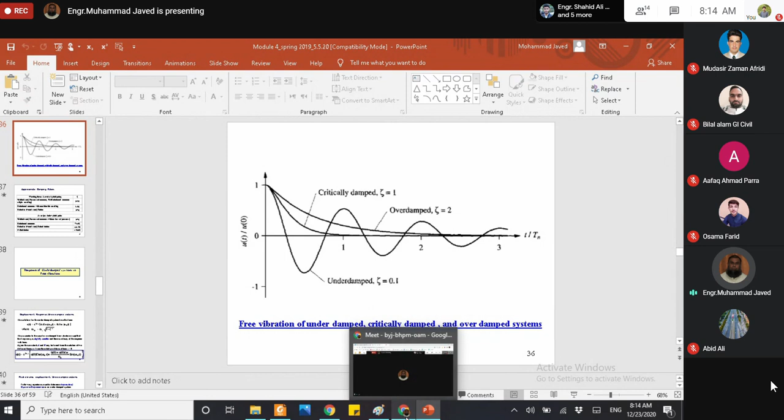As far as I remember, last time we discussed various types of damped systems, which are critically damped system, over damped system, and under damped system. And as we discussed, critically damped and over damped systems are of no use from civil engineering point of view. The only type of system of interest to civil engineers are under damped systems, that is the damped system in which the damping ratio is less than 1. So in the next slide...

I am providing approximate damping ratio for various materials. If we have various structures, but the stresses are low, not more than half of the yield point or ultimate strength, then the damping ratio for welded steel, pre-stressed concrete, or well reinforced concrete which has slight cracking is 2 to 3%. Reinforced concrete structures with considerable cracking have relatively more damping ratio, 3 to 5%. And in case of bolted or riveted steel and timber structures, the damping ratio is 5 to 7%.

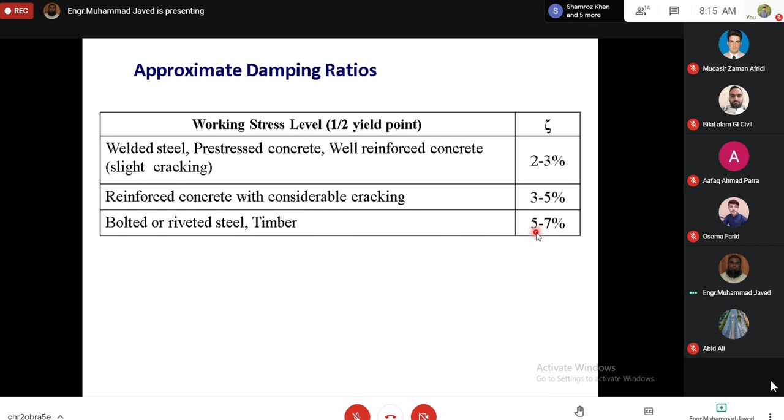However, if the stresses are high, in the vicinity of yield point or ultimate strength, then the damping ratio for the same materials increases, because with the increase in stress, the damage or extent of cracking increases. Consequently, the damping ratio will increase.

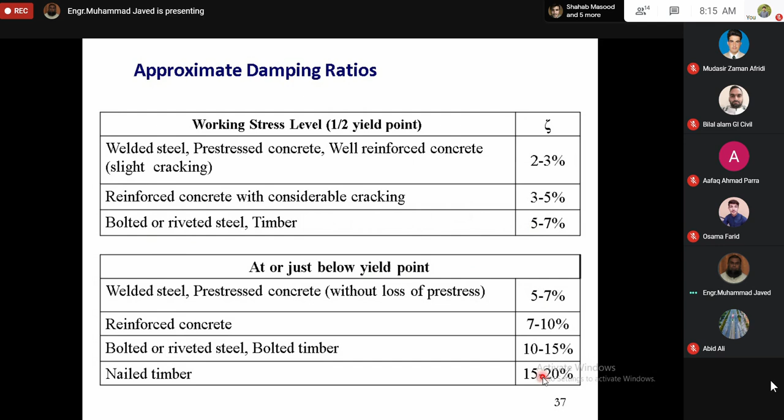So as I discussed, from civil engineering point of view we are interested only in under damped systems. Therefore, in the coming slides we will discuss the response of an under damped system when subjected to free vibration.

Just like the undamped system, we can solve the second order differential equation for an underdamped system, which is of this type, in which A and B are constants that can be determined by initial conditions. And omega D, which is known as the damped natural frequency, is the undamped natural frequency into the square root of 1 minus zeta square.

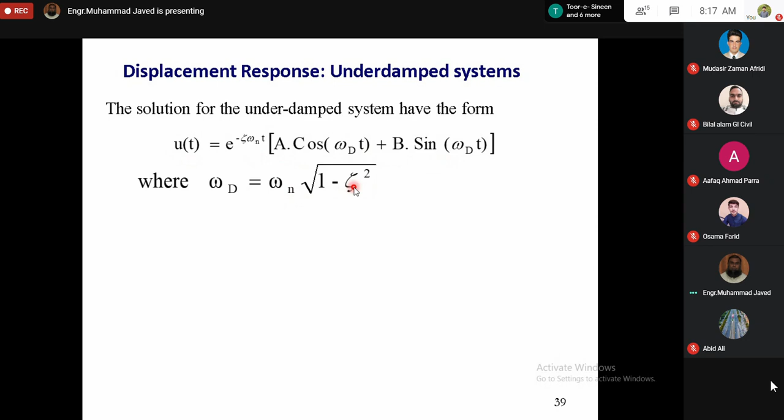As I said, A and B can be determined by initial conditions, that is displacement and velocity at the start of free vibration at t equal to 0. If we determine these values and substitute them in this equation, the final equation is given below. From this equation we can find the displacement response of an underdamped system when subjected to free vibration.

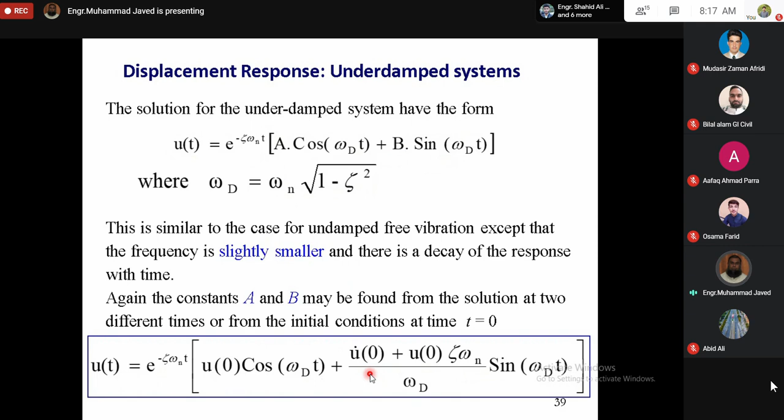Once we calculate U0, we multiply it with K to get the peak value of equivalent static force.

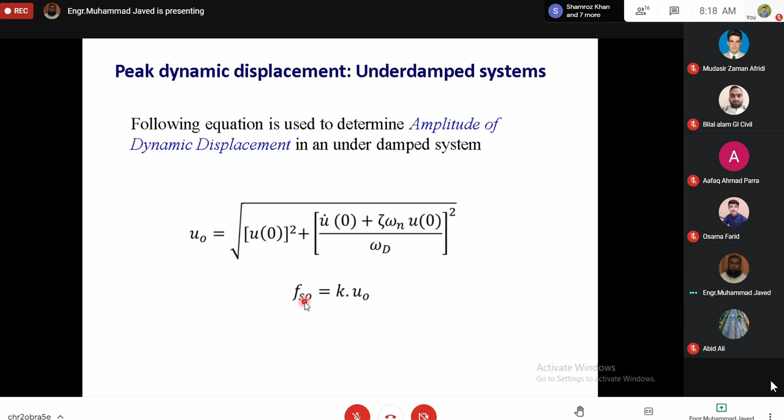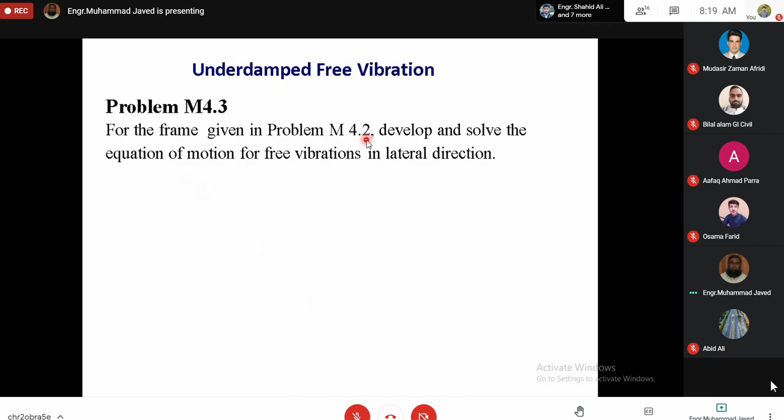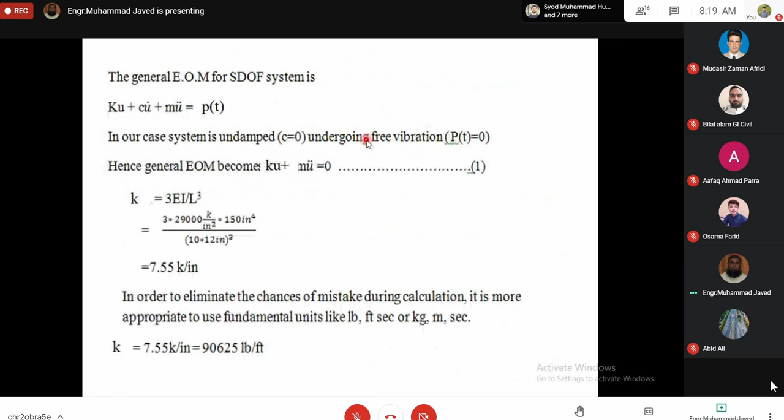So now we are in a position to solve a problem, and we will resolve problem 4.2 for a damping ratio of 5%. If you remember, in problem 4.2 we were having a frame which we considered as an undamped system. Now we will consider a damping ratio of 5%.

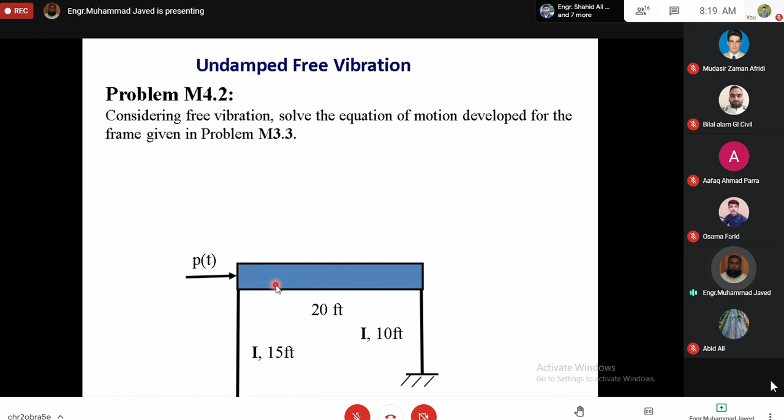As we calculated the natural circular frequency in problem 4.2, which was 34.79 radians per second, from this we can calculate the damped natural frequency, which is almost the same: omega n is 34.79, omega d is 34.77. The insignificant change is because the damping ratio is small. If zeta is 0.05, zeta square will be 0.0025, and 1 minus zeta square will be 0.997. The square root of 0.997 is almost equal to 1, so there is no significant change in the values of these two frequencies.

From this we can calculate the value of the viscous damping coefficient. Damping ratio is viscous damping coefficient divided by 2m omega n, or C is equal to zeta into 2m omega n. Mass is given, omega n is calculated, zeta is 0.05, so we can calculate C.

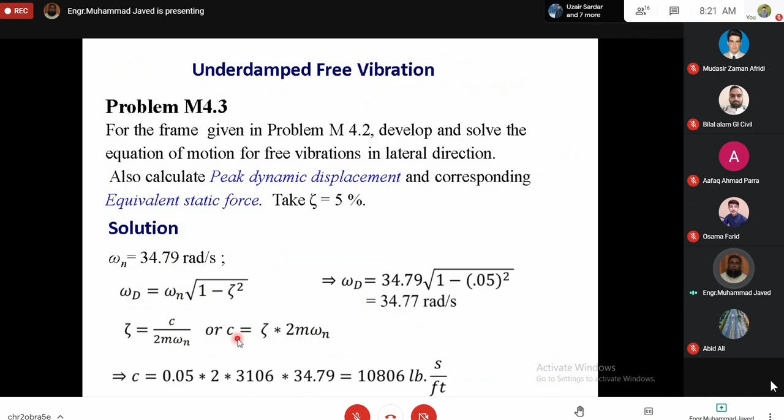And we can substitute this value in the equation of motion for the undamped system subjected to free vibration. This is the equation of motion for a damped single degree of freedom system subjected to free vibration.

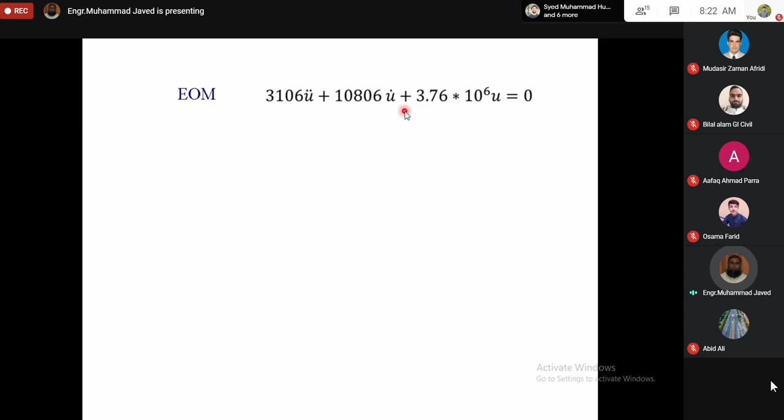A few slides back we derived an expression for finding the response of underdamped systems. Using that solution, we can find the displacement response of the system with this equation of motion. This u(0), which was given in problem 4.2, was 0.002 feet, and u dot of 0 was 0.3 feet per second. Omega n and omega d are just calculated.

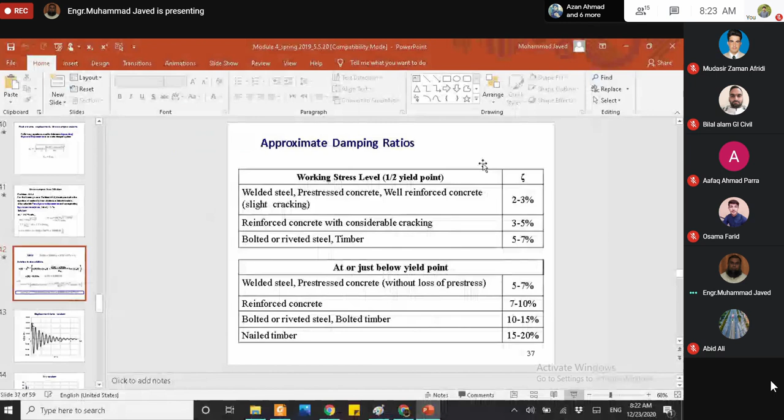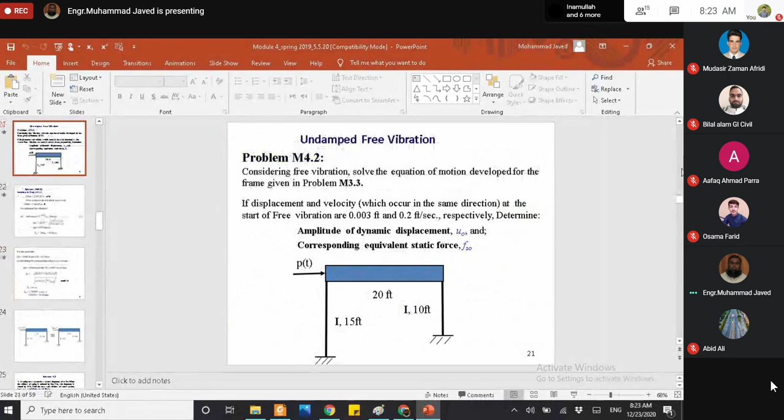There is a small correction: this is 0.003 feet per second.

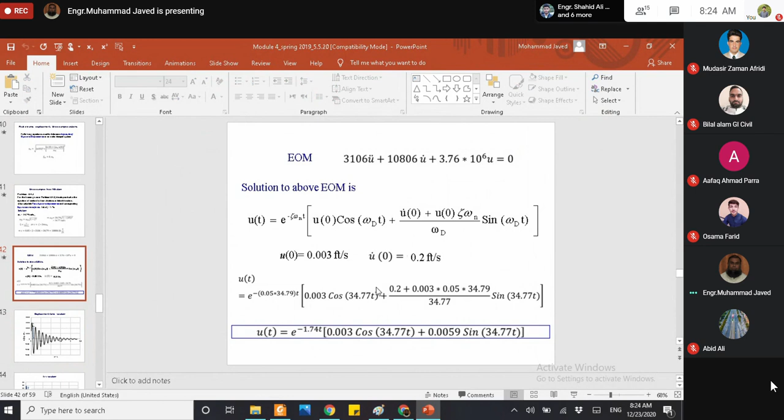So substituting these values in the above equation, we get this equation, which after simplification is in this form.

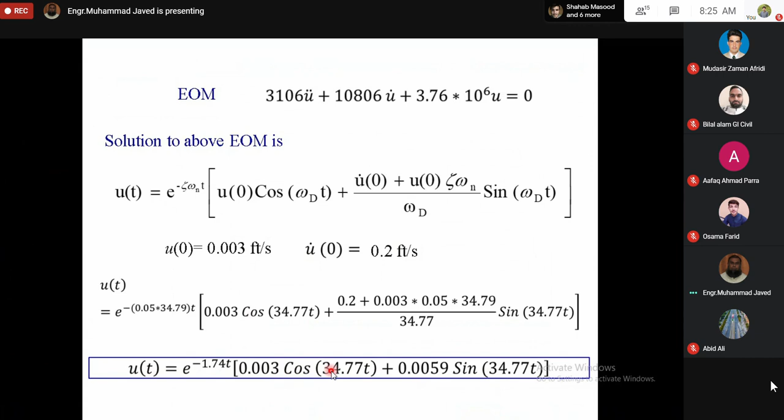Now you can see, due to damping, in every cycle the peak dynamic displacement is decreasing. In case of an undamped system, there is no energy dissipation, therefore the peak dynamic displacement remains the same. Here, due to damping, you can see the decrease in peak dynamic displacement in every cycle.

Anyhow, now we can find the peak dynamic displacement. We have all the values. Peak dynamic displacement comes out to be 0.0066 feet, and the corresponding equivalent static force is K into U naught, which is 24.8 K.

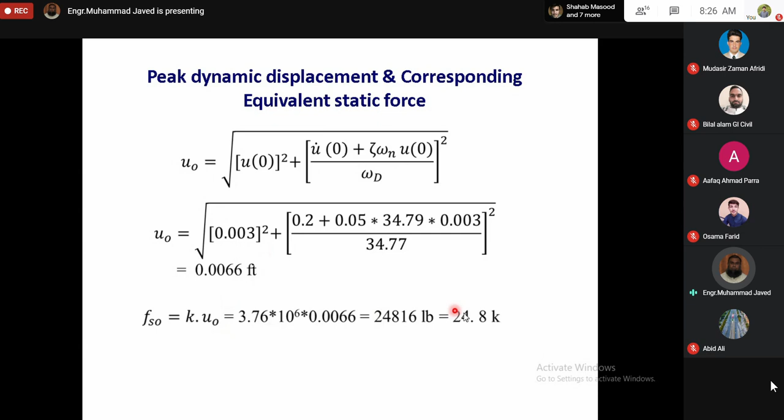I will wait for a few seconds. If there is no question, I will proceed.

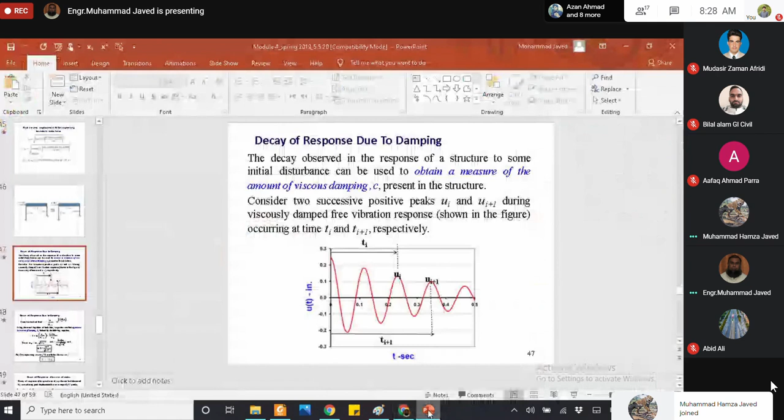Now the reduction in peak dynamic displacement due to damping is known as decay of response. And decay of response due to damping helps us in calculating the damping ratio.

If there is an existing structure and it is required to find the damping ratio, we conduct a free vibration test on the structure. We provide instruments in the structure before testing, and during free vibration we record the displacement-time response of the structure. Once we record that response and plot the recorded data, we can calculate the damping ratio.

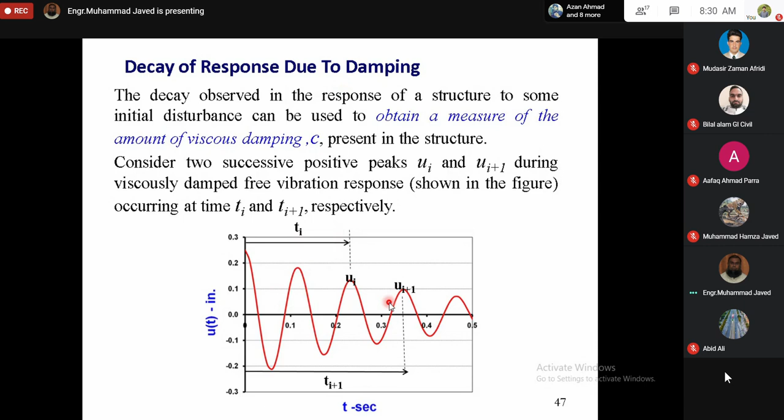Here an equation is derived to find the damping ratio with the help of recorded data. This is the free vibration response of a system. Let Ui be the peak displacement after Ti time, and Ui+1 be the peak displacement in the next successive cycle. We can derive an equation that peak displacement after time divided by peak displacement in the next cycle is equal to e raised to power this expression.

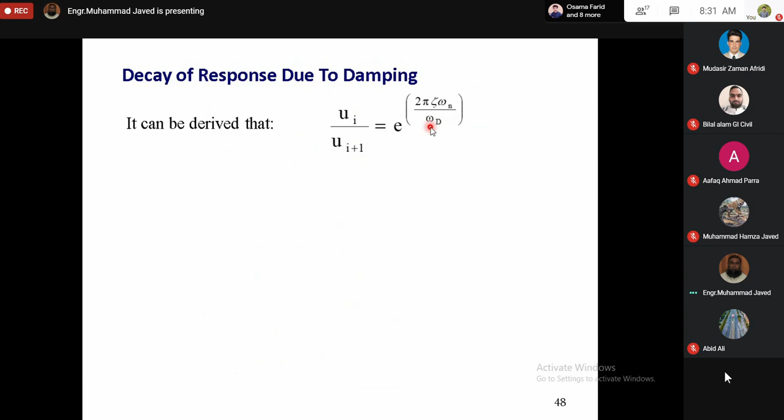Taking natural log of both sides, we get log of Ui by Ui+1 is equal to 2 pi zeta omega n by omega d. Log of Ui by Ui+1 is represented by the Greek symbol delta, and this is known as the logarithmic decrement of damping.

This expression can be used to calculate the damping ratio. As you can see in the next slide, omega d is equal to omega n into square root of 1 minus zeta square, and replacing omega d with this equation, we get delta equal to 2 pi zeta omega n by omega n into square root of 1 minus zeta square. So if we have recorded two successive peak displacements, we can find the damping ratio of the system from this equation.

For civil engineering systems, zeta is usually 0.05, but in any case it does not exceed 0.1. If we take zeta as 0.1, zeta square will be 0.01, 1 minus zeta square will be 0.99, and the square root of 0.99 is approximately 1. So for civil engineering systems, the above equation reduces to this simpler form.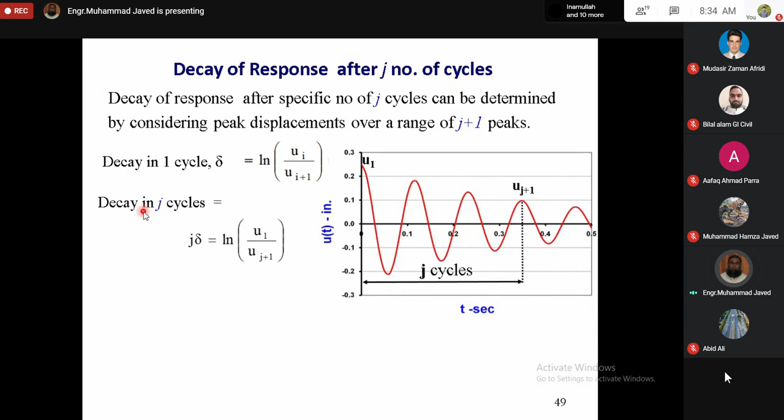For that purpose, again the free vibration data is considered. Let U1 be the first peak displacement and Uj+1 be the peak displacement after J cycles. J is any round number, and we can derive an equation so that the response after J cycles can be calculated, which after rearranging converts to this form. With the help of this equation, we can calculate the response after J cycles.

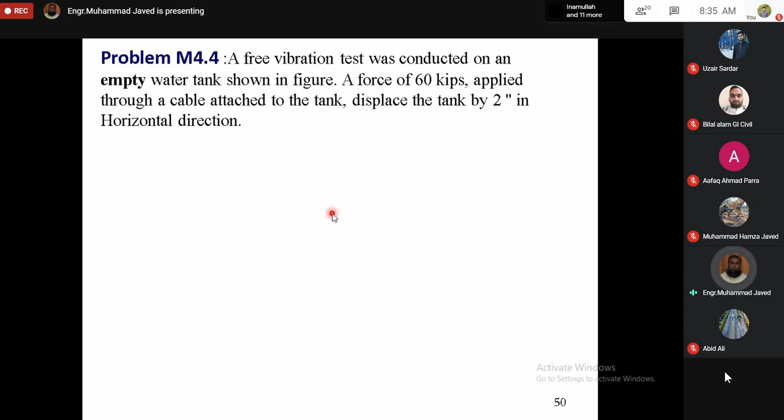An empty water tank is shown, and a free vibration test is conducted on the empty tank by applying a 60 kip force through a cable attached to the tank. The angle of the cable with the horizontal axis is 60 degrees, and the stiffness of the system is such that the tank displaces in the horizontal direction by 2 inches.

Having said that, the cable is suddenly cut, or it is suddenly released from the source. By doing so, the strain energy stored in the tank will start transforming into kinetic energy, and vice versa. Due to this transformation of energy, vibration will take place.

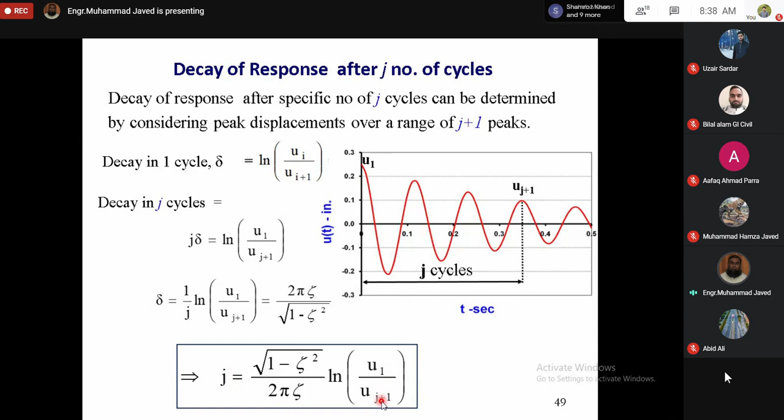So we will solve this problem by starting with calculating the damping ratio, zeta. It is given that after 5 cycles, the peak dynamic displacement is 0.9 inch. So J is equal to 5, Uj+1 is 0.9 inch, and U1, the peak dynamic displacement in the first cycle, is 2 inch. We can apply this equation to find the value of zeta. J is 5, U1 is 2 inch, Uj+1 is 0.9, the only unknown is zeta. If we calculate zeta, its value is 0.0254, or 2.54%.

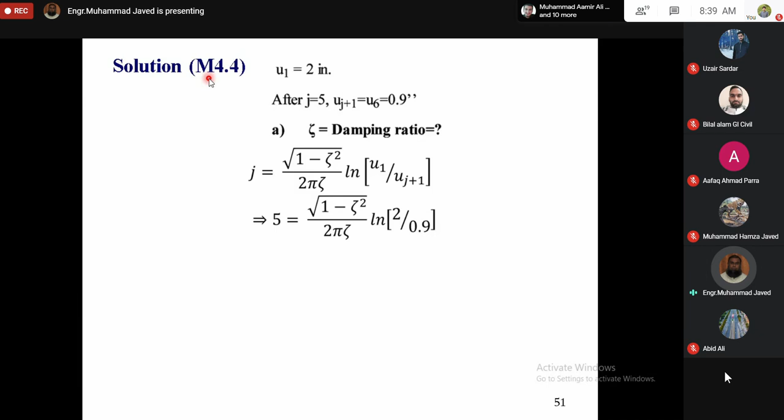Next, it is required to compute the natural time period. For calculating the natural time period, you have to use its definition. Natural time period is the time required by a system, a single degree of freedom system, to complete one cycle of vibration in the absence of force, that is, during free vibration. Here it is given that 5 cycles are completed in 2.55 seconds. It means one cycle will complete in 2.55 divided by 5 seconds.

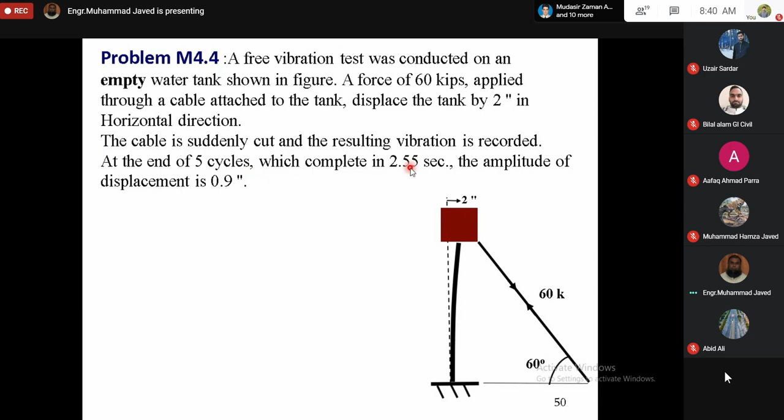So the natural time period will be 0.51 second. But remember, this time period involves damping. So this is damped natural time period. With the help of damped natural time period, we can find simple Tn natural time period.

Or Tn is equal to Td into 1 minus zeta square. Value of zeta is just calculated. We can find Td is also calculated. We can find Tn, which is almost same because damping ratio is very small. Therefore, there is no significant change in the values of Tn and Td.

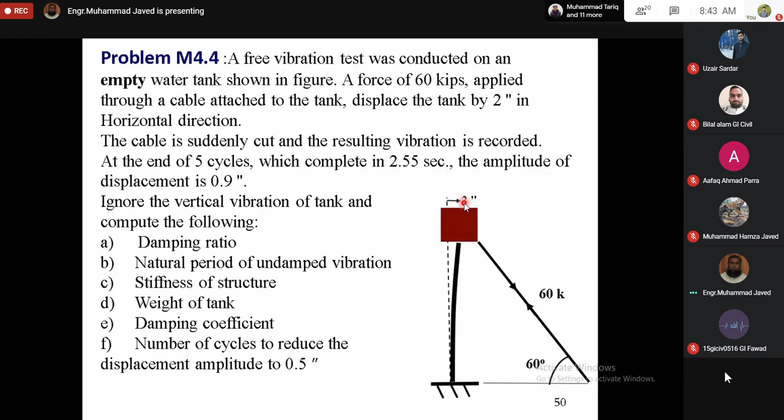Next step is to find the stiffness. So for that purpose, we need to apply the definition of stiffness. Stiffness is force required to produce unit deformation. Here we are considering stiffness in horizontal direction. In horizontal direction, the displacement is 2 inch under an inclined force of 60 kip. Now this 2 inch displacement is produced due to the horizontal component of this inclined force, and horizontal component of this inclined force is 60 cos 60. Stiffness will be therefore 60 cos 60 divided by 2, or 15 kip per inch or 18,000 pound per foot.

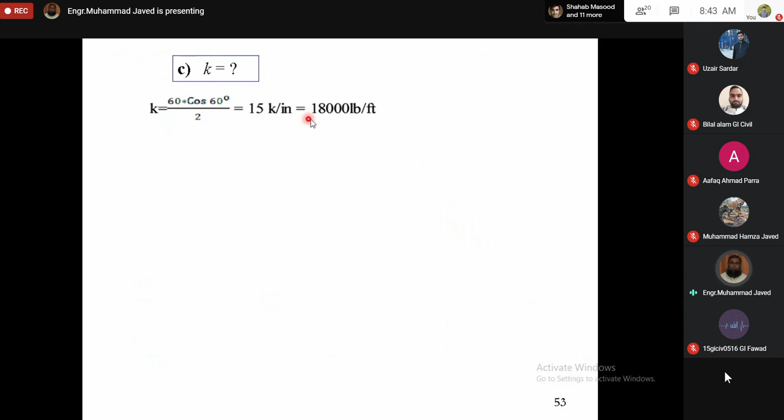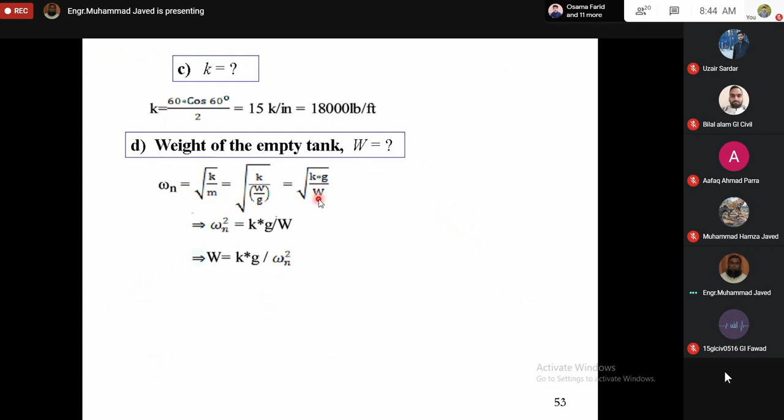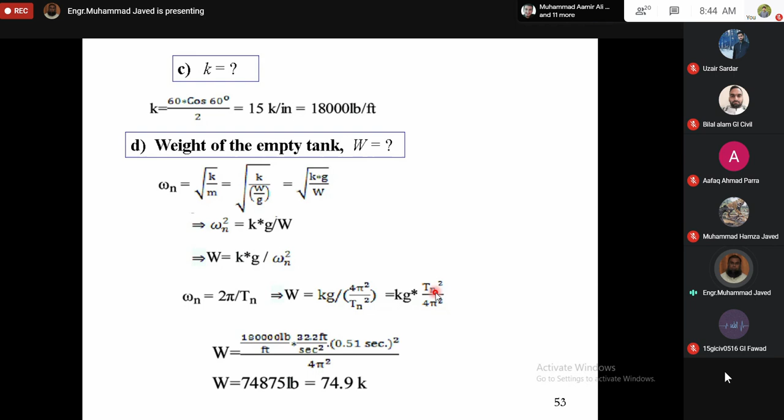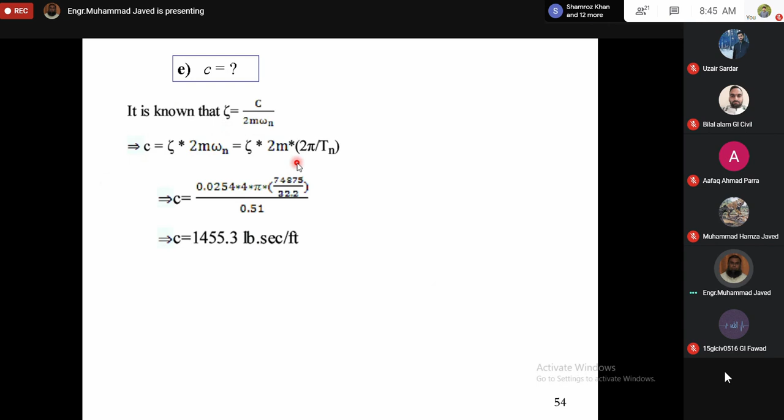Then viscous damping coefficient, which can be calculated by using the definition of damping ratio, and which is 1455.3 pounds second per foot.

And finally, number of cycles to reduce displacement amplitude from 2 inch to 0.5 inch. That is, we need to calculate the number of cycles such that the displacement, which was 2 inch at the start of free vibration, reduces to 0.5 inch. So we have developed an equation. From that equation, we can calculate the number of cycles, which is 8.69. Now, number of cycles shall be a round number, so rounding 8.69 will give us 9.

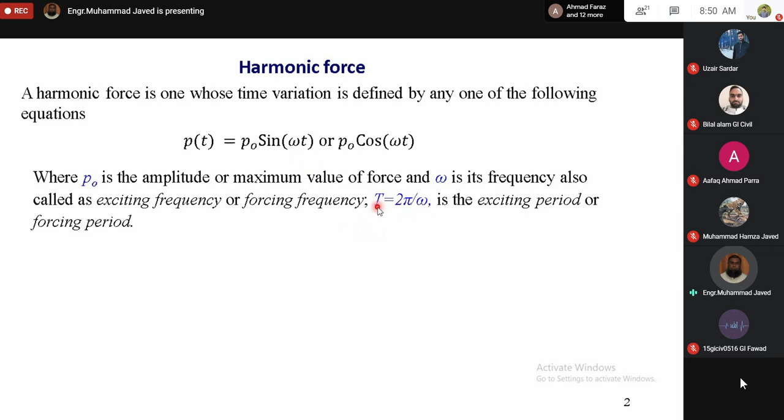In this, P naught is the amplitude of harmonic force and omega is the frequency of the force. This is not natural frequency, it is circular frequency of the force, which is also known as exciting frequency or forcing frequency. And with omega we can find the value of t, which is known as exciting period or forcing period, which can be defined as time required by a harmonic force to complete its one cycle, not one cycle of vibration, but one cycle of the force.

The equations used in this lecture are strictly applicable to sine variation of harmonic force: Pt is equal to P naught sine omega t.

Examples of harmonic forces are unbalanced forces in rotating machines. I gave you examples in the first lecture that when an unbalancing effect occurs in a rotating machine, due to that reason the centrifugal forces are produced. Rotating machine can be any machine which rotates about its center, such as turbines, electric motors, generators, fans, rotating shafts.

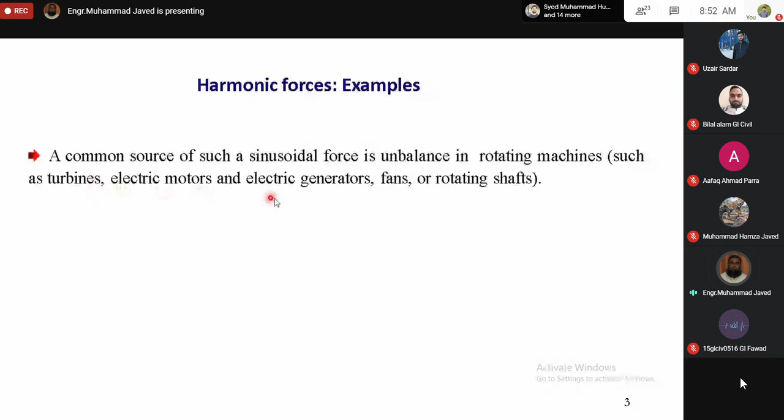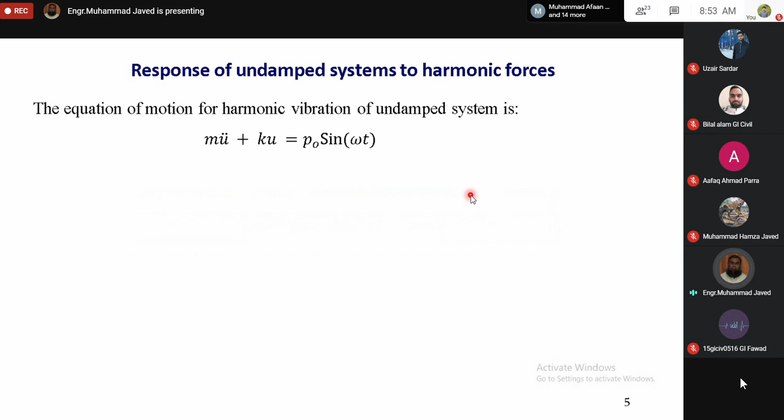Now, just like the previous lecture, we will first discuss the response of undamped system subjected to harmonic force, and then we will discuss the response of damped system subjected to harmonic forces. So first of all, let us solve the response of undamped system subjected to harmonic force.

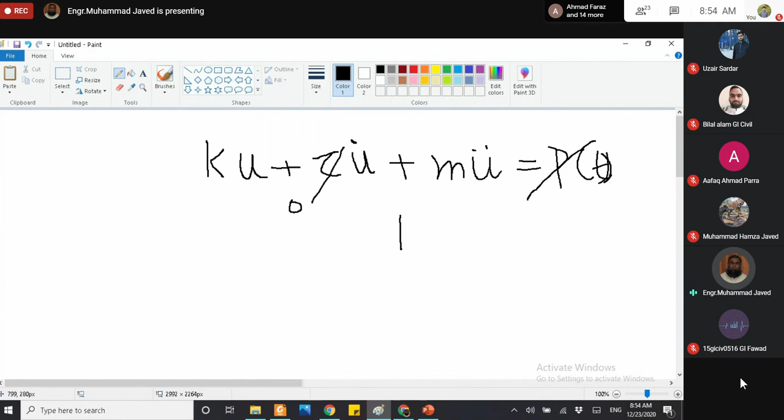As you know, the generalized equation of motion for single degree of freedom system is of this type. If the system is undamped, this C is 0. If the forces are harmonic force, P of t can be represented by this equation, and the equation of motion for such system is of this type.